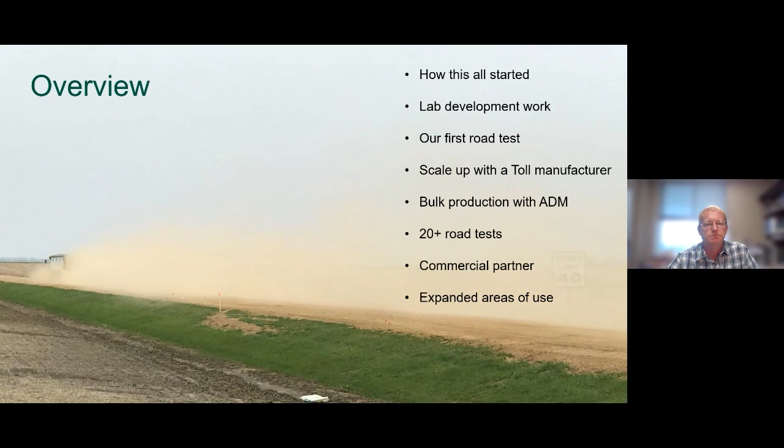So how did we get started? So several years ago, prior to this, I worked on a lot of research projects that were led by other principal investigators, and a large part of these were soy focused, and I would help them turn their lab scale soy product into gallons of material that they could share with other companies. So I learned quite a bit about them and how to make these materials and how to tailor them to

get the desired properties. And about that time, there was a call for road dust research in the Bakken oil field. With all of the expanded drilling platforms and the gravel roads that were being put up and the huge amount of truck traffic, there was a big dust problem going on out there, and they wanted people to research that and see what the effect of the dust was and look for solutions there.

And also at that time, I learned of glycerol glut. Glycerol is a byproduct from biodiesel production, and there's enormous amounts of glycerol generated as a waste product. And so if you can find something to do with that, you've got a cheap, ready supply of material.

So based on what I had been doing in the soy research environments, I thought, well, maybe I can use glycerol to modify the soybean oil and make something that can be dispersed in water and used to help the dust problem out in the West. So I approached the North Dakota Soybean Council with a proposal, and they funded my first grant to start our work in the lab.

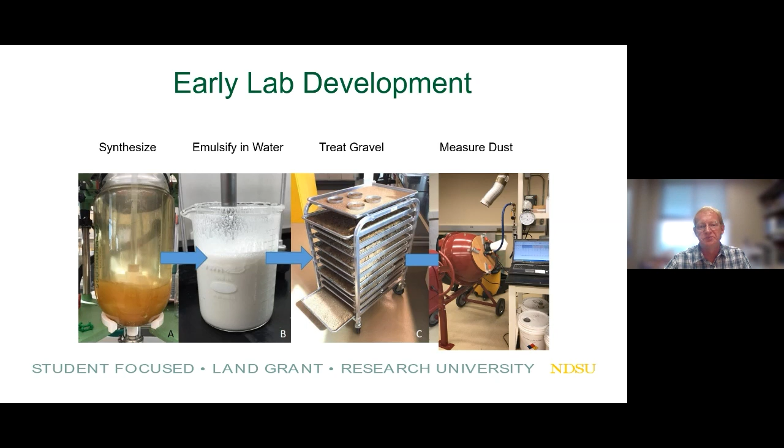The material itself isn't just a blend of soybean oil and glycerol, because soybean oil and glycerol don't mix. They're immiscible, kind of like water and oil. So the approach we take is to use the glycerol in a chemical reaction to break down the soybean oil.

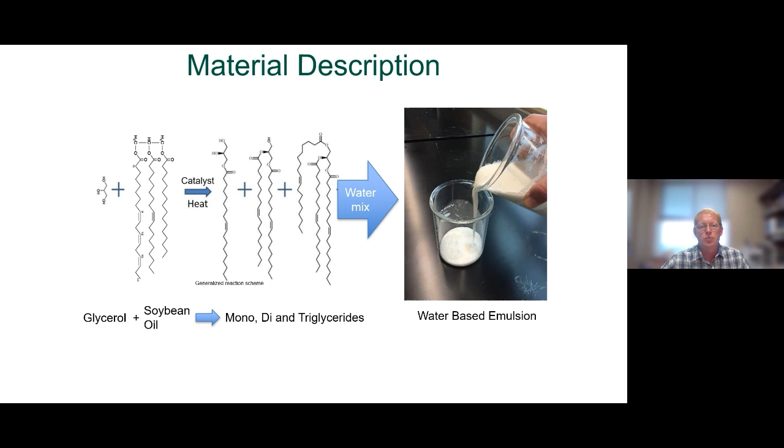Soybean oil is a triglyceride, so it has 3 of these long fatty chains. What we do is break this apart into 3 subpieces so that we make a monoglyceride, a diglyceride, and then some of the oil remains as the triglyceride. By forming these mono and diglycerides, they become the surfactants, the emulsifiers that allow the product to be dispersed in water. So essentially we're making our own emulsifier from the soybean oil itself, which is really what makes our product unique and allows us to be water dispersed without the additional costly emulsifiers.

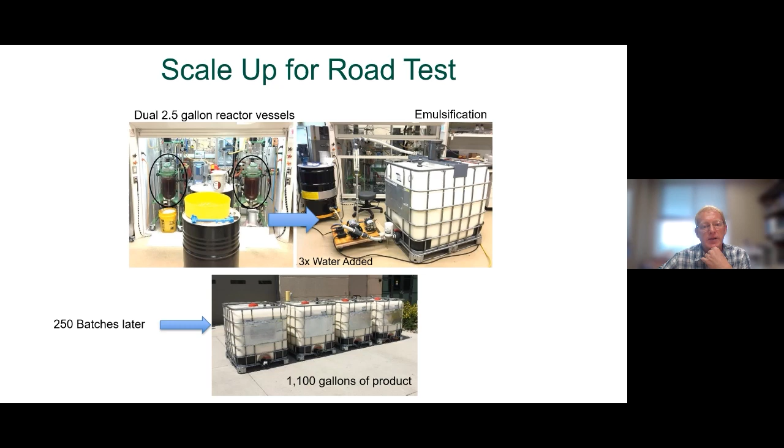The Soybean Council was pleased with our work in year 1, and they funded us again to scale up and make enough material to do our first road test. We utilized our 2.5 gallon reactors in our lab at NDSU — I have 2 of them. I made about 250 batches, 2 each morning and 2 in the afternoon, for about 4 months, making this concentrate. Then I emulsified it with water using this homemade setup, and produced 1,100 gallons of emulsified product that we used for our first road test.

This road test was done on County Road 22 in Cass County — the Prosper Road. It's about 5 miles of gravel with a lot of truck traffic; there's a grain elevator down there. This is a problem road for dust and stabilization. Jason Benson from Cass County helped us coordinate this site. We treated the first 600 feet, and the remainder of the road was treated with calcium chloride, so it was a really good comparison study for us that summer to see how we compared against the standard of calcium chloride.

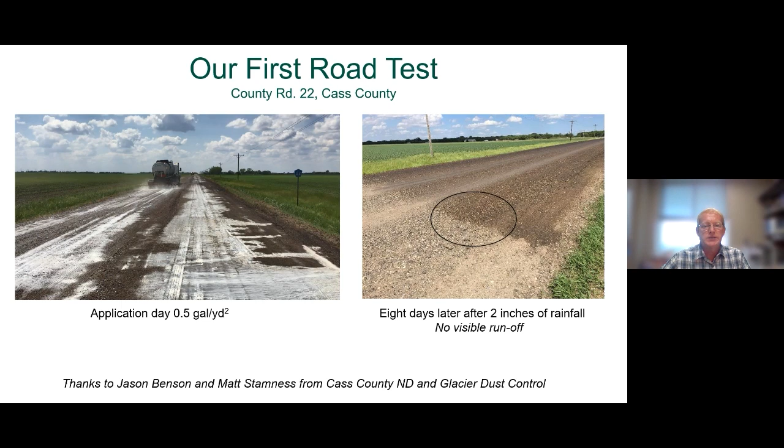One promising thing you can see from the photo is that after 8 days — this is application day — after 8 days and 2 inches of rainfall, you can clearly see the outline of where our product was put down. This shows that the rainwater didn't wash it away or cause it to migrate to the shoulder. It stayed in place once it was put down and cured.

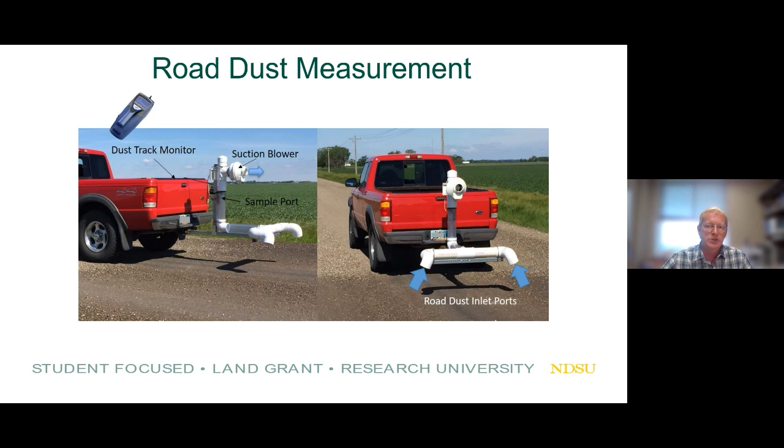So we needed a way to test our dust control and see how well it was working, and we built this apparatus — the idea was borrowed from Penn State. It basically consists of a vacuum cleaner mounted on the back of a pickup truck that draws in the dust cloud through two ports as you're driving down the road. Inside there's a laser detection cell that gives us the total amount of dust per cubic meter of air, so this is a real-time dust measurement. We can simply drive this down the gravel from the treated section to the untreated section and see the difference in dust generation.

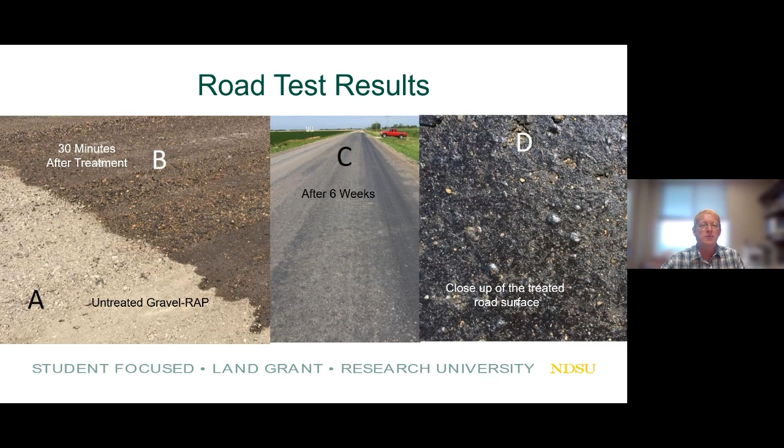This sent us down another path of not only using this material for dust control, but also using it to rejuvenate and find uses for reclaimed asphalt pavement, because there's huge piles of this stuff sitting around, and they're always looking for new ways to utilize it.

The following year, we did crop toxicity testing, because a lot of people asked, what if I spray this on my road? Is it going to kill the crops, and what's it going to do to the plant life? So we partnered with Dr. Kirk Howatt at NDSU Weed Science, and we set up test plots with 6 crops: wheat, oats, canola, lentils, soybeans, and sunflowers. We planted those crops in stripes across rectangular test sections, about 10 by 25 feet or so. Then we randomized them and did 4 different application rates with replicates.

We did a section where we sprayed the ground right after we seeded, a pre-emergent application. Then a few months later, post-emergent, we sprayed directly on the leaves in a similar test matrix.

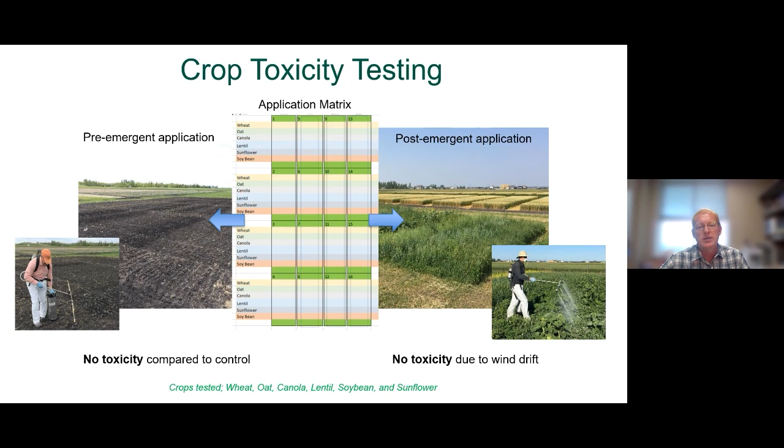The result of this study was that we did not see toxicity compared to our controls. Only when you completely saturated the leaf did you see some wilting, but it still didn't kill the plant at that point. This was meant to simulate wind-blown carryover—let's say your road's being treated on a windy day and some of that is being blown away as a fine mist. That fine mist would never be enough to completely saturate these leaves. So we're pretty confident that our product is non-toxic and not harmful to plants, which is good.

With continued funding, this time from the United Soybean Board, we scaled up even further. So no more 250 batches in my lab. We partnered with a chemical toller in South Carolina, and they have a 100-gallon vessel—actually their smallest reaction vessel—that we used to successfully scale up our process. We made 4 50-gallon batches of our material.

The other focus of this was not only to scale it up, but to show that we could use cheaper, unrefined starting materials. Prior to this point, we were using food grade soybean oil that I bought at Costco, and refined glycerin, and those are fairly expensive. So we wanted to show that we can scale it up and also use bulk crude materials to start with.

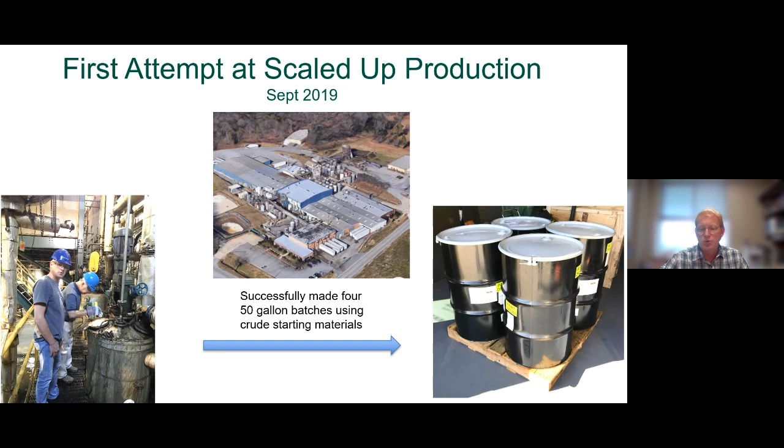Both of those points were played out at this stage. The following year, with continued funding from United Soybean Board, we scaled up even further. This time we partnered with Archer Daniels Midland. They have a pilot facility in Decatur, Illinois, and a 2,000-gallon reaction vessel.

Unfortunately, due to COVID restrictions, I wasn't able to travel and be on site. So we did everything over phone and email, but it went really well.

The first 2 batches were done faster than expected, and we had extra time and money left. So we decided, hey, let's just make as much material as we can within our budget. And we ended up making 55 totes, 275-gallon totes of ready to apply product.

At this point, we were working closely with BioBlend, and they helped coordinate a lot of the additional test sites. Originally this project was just 4 test sites, but we were able to make that additional material, and then with BioBlend's help, expand our test sites into over 20.

These are predominantly in Iowa, North Dakota, Minnesota, but also in Kansas, Arizona, and a few places in Canada. Not just county roads—some of these were gravel quarries, recycling plants, fertilizer facilities, and so forth. Here's a few pictures of some of those sites.

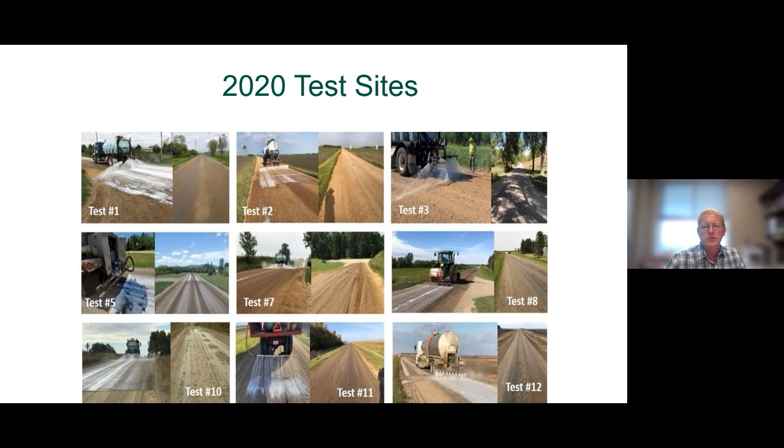This is more detail on one of the sites that we did. This is in Pisek, North Dakota. This is a township road, and you can kind of see a farmstead right next to it. Now, the farmer inherited this farm—it's a family farm, been in the family for generations—and he moved back there recently to retire, but the house was right next to the road.

He said the road dust problem was so bad that you couldn't even be in the yard when a car drove by. He was considering selling the property, and he heard about our research and begged us to do a test up there. So we did. We sent them a tote, and you can see he's using a borrowed crop sprayer.

This worked okay. The nozzles were a little small, so the spray was a fine mist. It just took many more passes. Normally you could do this in 1 or 2 passes—I think we did it about 10 or 12, but it still worked.

2 weeks later, we have a real nice firmed up base and no dust. This farmer couldn't be happier with the results. He's already ordering more and is thrilled that he can have the product on hand and apply it on his own without having to hire somebody.

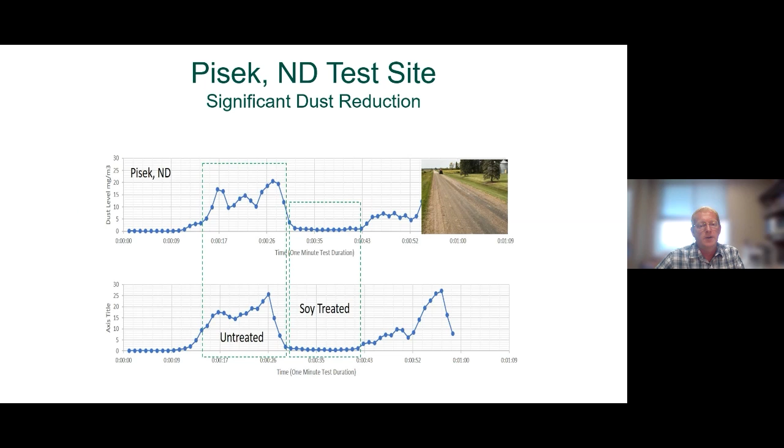So here's the vehicle mounted dust data from the Pisek site. On the left side, you'll see it's 0 because I'm just getting started. Then I start driving through the untreated section. There's quite a bit of dust, but then when you drive in front of his farmhouse, dust levels come way down. And then they pick up again as you pass through off to the other side. These are 2 passes that show a very good result at this site.

Recommendations for new users: usually when calcium chloride and mag chloride are put down, they pre-wet the road to help it soak in. That's not really necessary with this product. In fact, sometimes it performs better if the road is dry—it'll soak in and coat better.

Possibly if you have a sandy, loose roadway that when you wet, the water just runs right through it, then you may want to pre-wet. That'll help our product stay more in the upper layers where the dust is generated. And of course, it's always best before you do any dust control to prep the road, blade it, reshape and restore that crown, and bring that loose material from the shoulder back up and smooth it out so that the product has the ability to penetrate all of the loose surfaces on top. And then it's best to keep traffic off until the whiteness disappears for best results.

If they do drive on it, the material is non-corrosive, so that's another thing that sets us apart from the chlorides. It won't corrode your vehicle, and it cleans up easily with warm soapy water or just taking it through the car wash.

If you're interested in trying this material in your region, I would encourage you to get a small amount of material and test it on your gravel, because every county is different and your application rate may vary from the county over. The best way to determine if this is going to work for you is to purchase a barrel or a tote, enough to try, and you can try different application rates in the process and kind of dial in what works best.

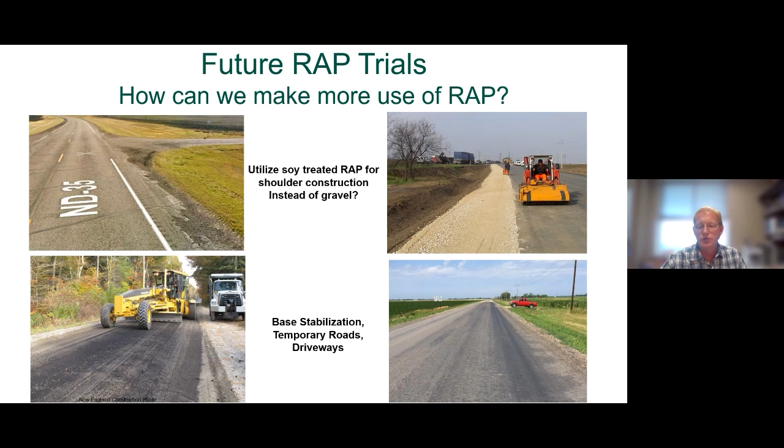Other markets beyond roads include gravel quarries and mining operations. They're extremely dusty with a lot of truck traffic, so we have a few of those going on. There's a windmill farm where we're doing testing as well. With the drought right now, these operations are trucking in thousands and thousands of gallons of water every day. One operation has 4 semi-trucks running nonstop, just spraying water to keep the dust down at these sites. Eventually economics come into play, because the fuel consumption just to spread that water continuously is quite high. So at some point that's going to pay for a dust control product that you put down and you don't have to keep reapplying it on a daily basis.

Other applications would be grain elevators or egg facilities where you have a lot of truck traffic on an unpaved lot. Horse riding arenas generate a lot of dust, and they don't like to use chlorides because it can dry out the horse's hooves and cause cracking, where our material doesn't do that.

National parks and protected areas are also good applications for this material due to its environmentally friendly nature. If you're close to sensitive waterways, this is going to stay intact and not pollute. There's an almond orchard we've done testing on in California. These gravel roads run right through the orchard, so of course they don't want to pollute that with chlorides or anything that would be toxic to the almond trees.

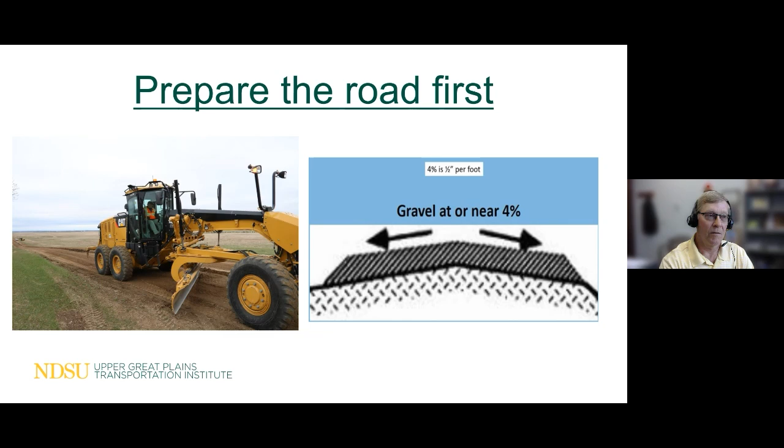This test strip was on a township road, generally fairly low traffic. However, during the farm season, it's a supply route for a fertilizer plant, so there gets to be quite a bit of heavy commercial traffic and field traffic as well.

We obtained permission from the town board first before applying the product, because they're the road authority and own the road. It's a good idea to talk to the road authority first to see what kind of permits may be required. I'll show you the video of the product being applied.

This is just a farm water truck with a 3.5 horse engine pressurizing a PVC pipe boom with 3/16 diameter holes drilled into it about every 3 inches.

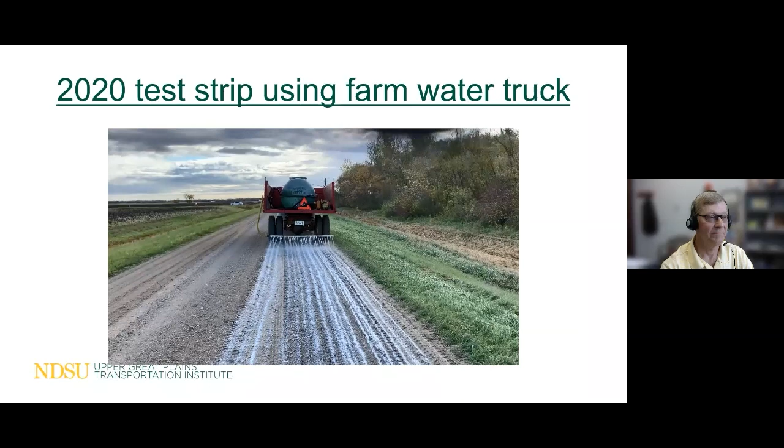Here's another short video of the product in action. You can see the reduction in dust as the vehicle reaches the treated segment there. It's quite significant, and that was taken this spring after the product had overwintered on this roadway.

As I mentioned, it was applied September 25th at 0.34 gallons per square yard. Virtually no dust was observed throughout the fall season. I applied a second application this spring on May 8th at 1/4 gallon per square yard, and I'm still seeing great performance, with a vast improvement compared to the dust generated with no material applied at all.

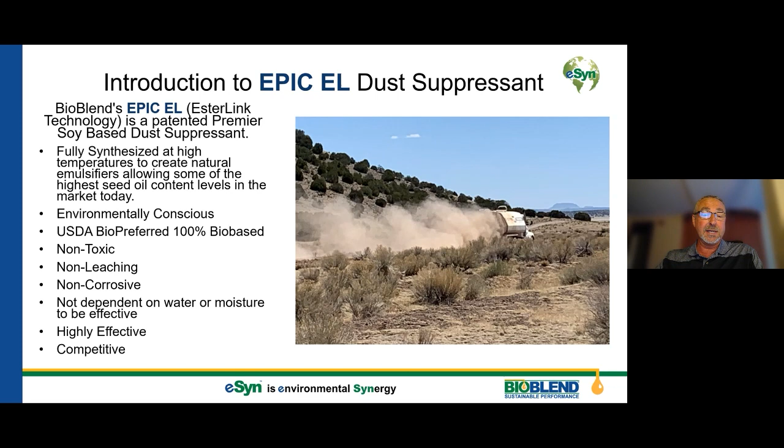The commercialization efforts that we've done over the last 18 months: it was released on Earth Day of 2021. Like I said, 16 to 18 months' worth of research and development has gone into it from our standpoint, working with Jim, primarily focused on the Midwest. We've tested, as Jim said, many different versions of it, some with success, some with failures, but at each junction we learned a lot, and we pivoted to make modifications and come up with a good solid product as we have today.

To date, I know Jim had talked about 20 test sites. We're up over 30 different sites that we've tested on, and continuing to evaluate a number of the most recent sites that were put down this spring.

As I said earlier, we've done a lot of research on the raw material side, trying to find the best source points to keep this product as cost effective as we can. That has proven to be a little bit difficult this year, just because of the prices of soybeans and ultimately soybean oils. But we're doing our best from a logistics standpoint to bring the product to market by the most cost-effective means possible. And, as Jim talked about, looking at some of the other applications, we've been working closely with Jim on that, and going through and securing regulatory approvals.

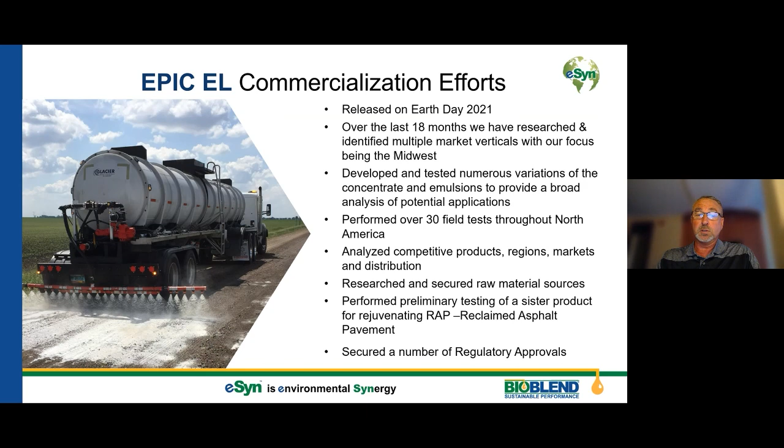The EPIC EL, we deliver it in the most economical means possible, ideally in a pure concentrate form, which I'll share pictures of here shortly. And if we can't ship it in the concentrate form and have you mix it, we can ship it in an emulsion form. Either product can be shipped in bulk, totes, drums, and pails.

We prefer you to work with one of our business managers just to optimize. Every road surface, every region is different. So we can work together to hone in on what your application is, to come up with the best concentration ratio as well as the best application rate.

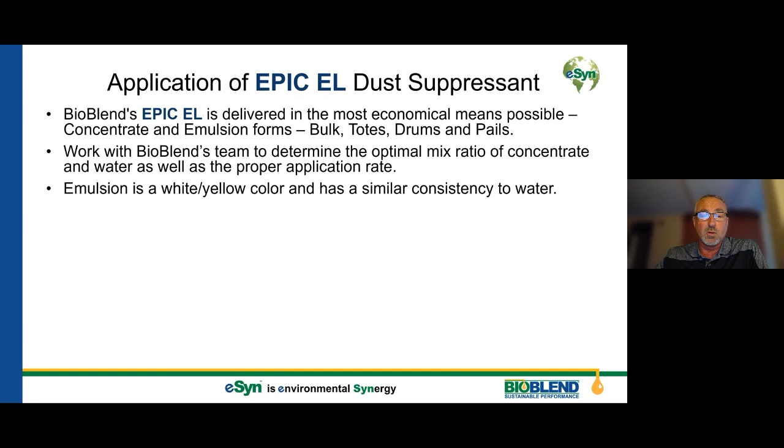When it's emulsified with water, it still has a water consistency to it. It'll be more of a white, yellowish color, kind of like whole milk. And typical application equipment can be used to apply this product. You really don't need anything high tech for it.

Having commercial units spray it is obviously the best path if possible, but if you're looking to do just a small portion on your own, of your township road or your driveway or within your own farmland, any type of equipment can be used, as you've seen from some of the stuff that Jim and Kelly shared as well.

Ideally, we want a pressurized spray bar. We want to be able to calculate this to make sure we're getting the right amount of product down. We don't want to skimp on the amount going down, making sure it's going to perform for you. If we're going to go through it, we want to make sure that we've got the right amount going down, and it seems to be somewhere between 0.4 of a gallon to half a gallon per square yard.

Cure time can vary. Obviously weather plays a big part in that. The cure time with Kelly's application up there in Kittson County took a little longer. It was a cool, cloudy day. There's been other applications where, on a nice sunny warm day with a gentle breeze, it will cure where you can drive over it within 10-15 minutes.

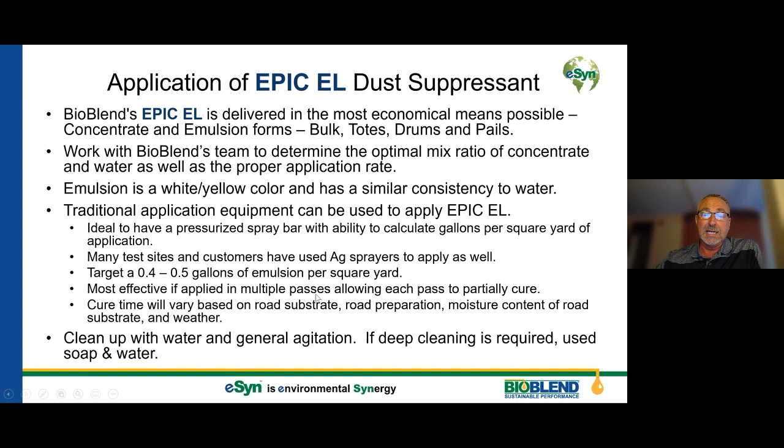Clean up when you're done. It really is simple, as Jim talked about there. It cleans up very easily with water. It may take some general agitation in your tank, but if you really needed to do a deep cleaning, just soap and water will do just fine.

If you did this and let it sit for 24-48 hours, you may have to do general agitation to it again to get it to fully emulsify, but that is what the product that you're looking to eventually apply, you want it to look like that.

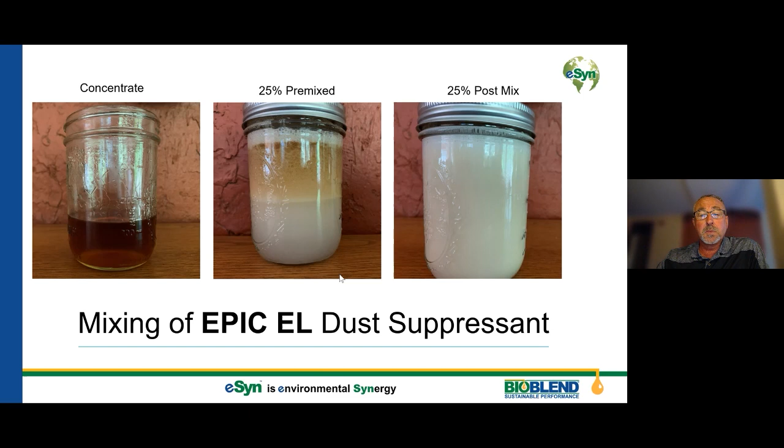Traditional contract spray systems, as you saw in some of the pictures there, are what you see a lot of out today with chlorides. Those traditional types of spray systems can be used with this product as well. All different types of nozzles and spray bars and booms.

The main thing, you want to be able to measure how much you're putting down, and you want a good even spray pattern. You don't want a lot of overlap from your spray pattern, and you want to be able to adjust so maybe you're not spraying quite so hard on the outsides of the road as you are in the traffic pattern areas of the roads.

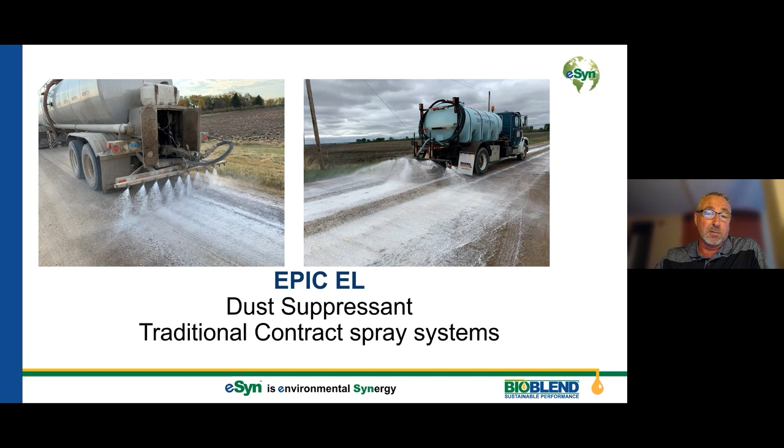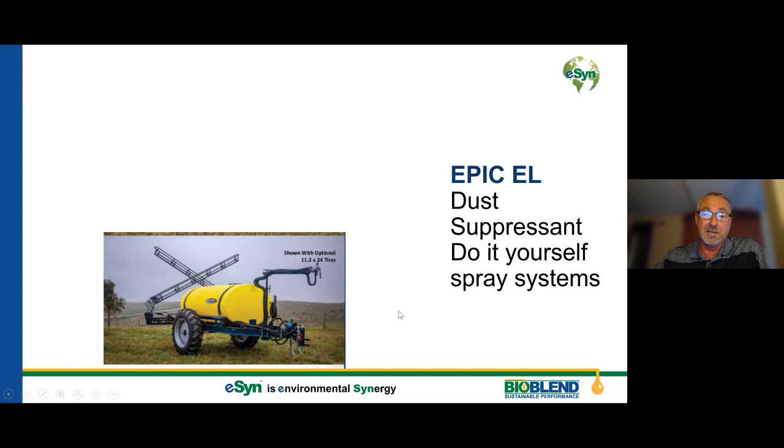You want a good heavy coverage on it, not misting. If you do have it misting, you're going to have to do multiple runs to make it effective. I've had a number of people use it just on their side-by-side ATVs, similar to that. Very effective means to do smaller areas.

So some of the ideal uses that we see, as Jim talked about alternative uses, but really in those environmentally sensitive areas. This product is not going to be as inexpensive as chlorides. So you have to evaluate where is the best place for it, and finding those environmentally sensitive areas, that's a good place to start.

Uses in high maintenance areas, intersections, inclines, corners, those areas where you've got a lot of acceleration or braking, you end up getting the potholes, the raveling, the rumble strips. Those are great areas to look at applying this product, really truly to help stabilize as much as keep the dust down.

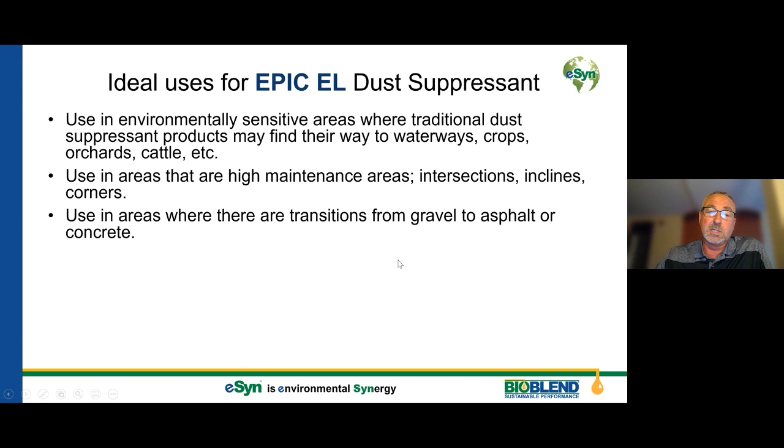Transition areas are always troublesome areas, where you're transitioning from an asphalt road to a gravel road, or a concrete slab coming into a grain elevator, for instance. Those areas tend to always need a lot of maintenance. Great spot for this product.

Then also early spring and late fall. Traditional type products keep that moisture in the soil. At night when you have temperatures dropping below 32 degrees, you tend to get potential freezing. With this type of product that will not happen. You won't get those potentially slippery surfaces because of freezing.

And then unfortunately right now a lot of areas are experiencing severe droughts, and where other products need that water, that moisture to be effective, this product does not need the moisture. So once it's applied, it's going to be effective whether it's a rainy season or a drought.

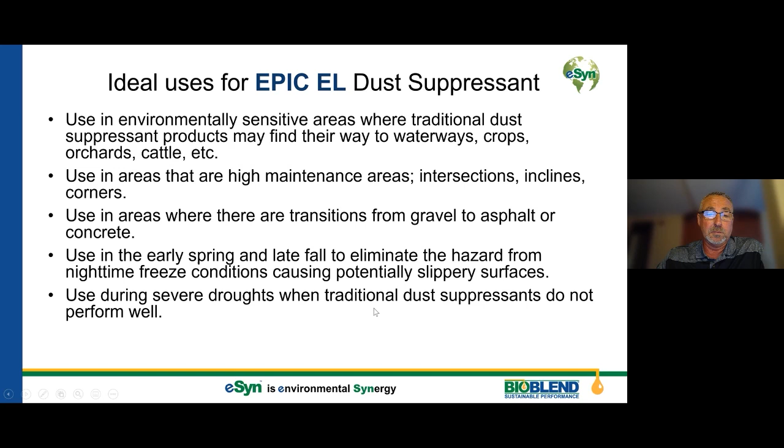Some of the approvals that we've received to date: as I mentioned earlier, the USDA BioPreferred. We did get that stamp, 100% bio-based. We did run third-party toxicity testing over and above what Jim's team did for crop toxicity. This is also a certified test procedure for products.

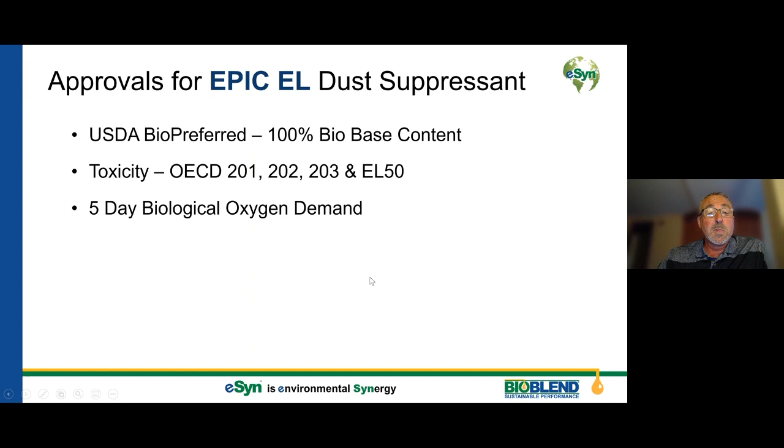We did a 5-day biological oxygen demand test on the product. We did a toxicity leaching procedure called TCLP, which is typical in landfills. This gives an idea of how much it could leach. And as we talked, there really is no leaching of this product. Once it's cured on the roadway, it sets up. And then we've started the process through the Organic Materials Review Institute as well.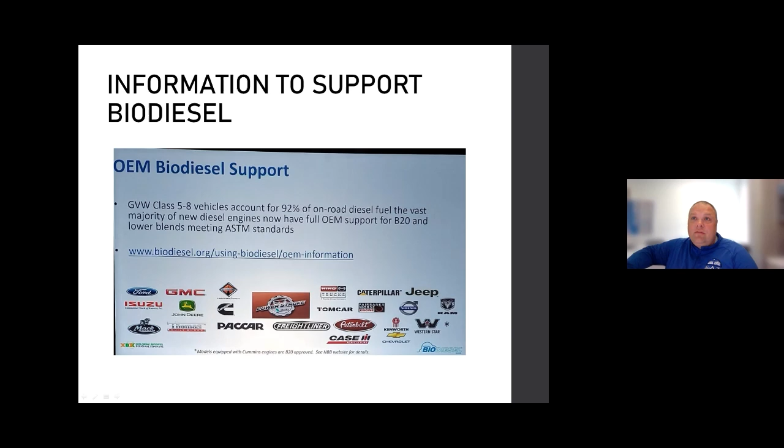Well, thank you guys for having us. On behalf of myself and the rest of the folks at Cities Area Transit, we're very honored to be here today to share our success story and our roadmap to where we're at today with the use of biodiesel. How it all got started is we were approached by the folks at MEG Corp a few years ago, and we were invited to attend a national biodiesel conference in Florida with them, a See for Yourself conference. So we attended that conference, and we learned about the use of biodiesel, the support from the manufacturers, and also the quality of it as well.

So with that being said, we attended that conference, learned more, and then we heard from end users and vendors that were using biodiesel. What really stuck with me was the folks in the heating and oil industry and their success stories with the use of biodiesel, and the less maintenance they need to do on their home furnaces.

That kind of put a light switch in my head to bring it back to my boss, Dale Bergman, and the folks at Cities Area Transit to talk about maybe we should try this. I think we have something here.

So we spoke with our staff, met with our maintenance staff and other folks, and with the great resources from the National Biodiesel Board, the North Dakota Soybean Council, and of course the great folks at MEG Corp, we decided to move forward with the use of biodiesel.

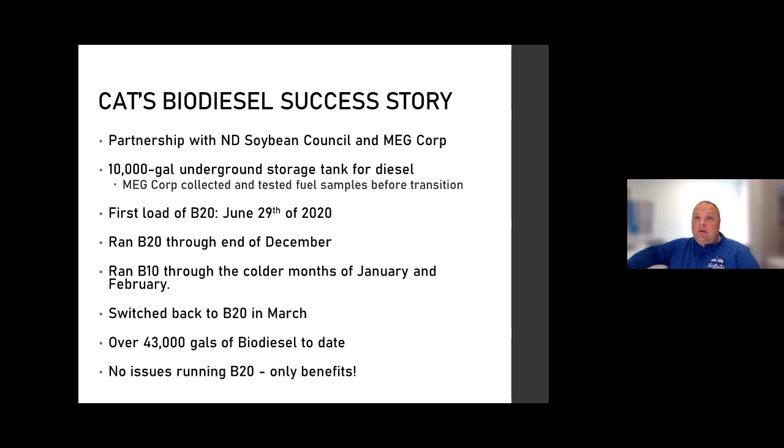So to date, we've burned over 43,000 gallons of biodiesel. And I'm happy to report that we have not had a single issue running B20.

What are those results? Well, first of all, most importantly, our environmental benefits. As Scott alluded to earlier, our CO2 pollutants were down 15.28%. That calculates to 108,969 pounds of emission reduction for our folks in the city of Grand Forks. So we were very excited to see those numbers.

Also, a recent study that's come out by the U.S. Department of Agriculture and Argonne National Laboratory found that biodiesel reduces greenhouse gas emissions by 72%. So very, very good numbers coming back as far as the help for the environment.

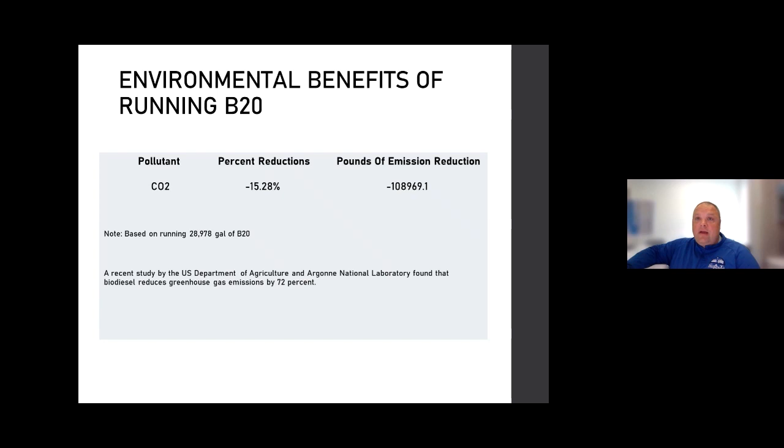We also noticed in our shop, we park our buses inside at night and they start up in the morning. We noticed a great reduction in exhaust fumes and other issues with having those buses in our shop. So again, happy to report the benefits of running B20.

As a transit agency with our buses, we operate in very high idle percentages. This creates issues with our emission systems. Our engines are all emission-based engines. We have what we could call the first generation that has a DPF filter, or diesel particulate filter, on it. What this does is it traps exhaust soot and ash in the exhaust and basically keeps them in the filters.

So what's B20 done for us in this regard? Well, it's helped us reduce the stress of the DPF filters plugging. And this has resulted in a major reduction of maintenance costs for us and downtime for our equipment.

Also, in our newer generation of emissions engines, they now use diesel exhaust fluid, or DEF fluid. We've noticed a great reduction in the use of our DEF fluid as well with the use of biodiesel, because our filters are having to regen a lot less due to the use of biodiesel.

So as I stated before, our oil samples are coming back cleaner, with a reduction of anywhere from 30 to 40% in soot levels. So why are we seeing that?

In an emissions engine, a diesel has an EGR valve. If the exhaust gases being monitored by the computer aren't clean enough to go out into the atmosphere, it recirculates through the engine, into the oil, and then back out into the exhaust. Because of our use of biodiesel, we're burning a lot cleaner fuel, and that's why we're seeing a big reduction in those problems.

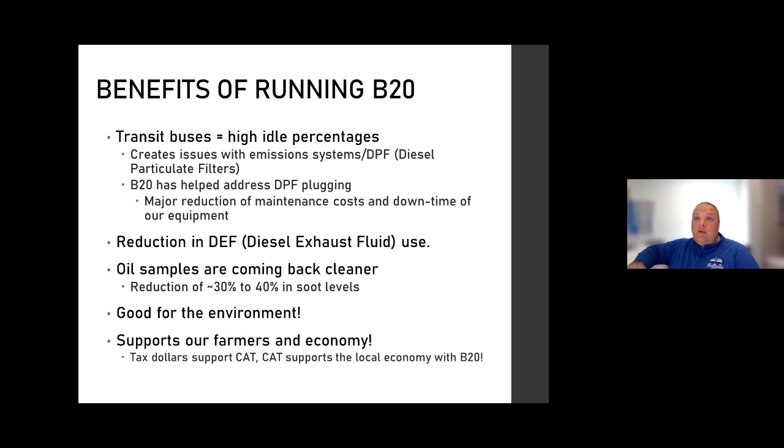It also supports our farmers. We come from a farming community here in Grand Forks, so we're very happy that the tax dollars we get from farmers and our local area can, in turn, run biodiesel and give back to the farmers as well.

I have a few pictures to share. This is our DPF filter before the use of biodiesel, and this filter was in for about 4 months, so you can see it's completely plugged. In a DPF filter, there are small honeycomb tubes running down through, and as you can see, the top of this surface is completely plugged along with those honeycomb tubes.

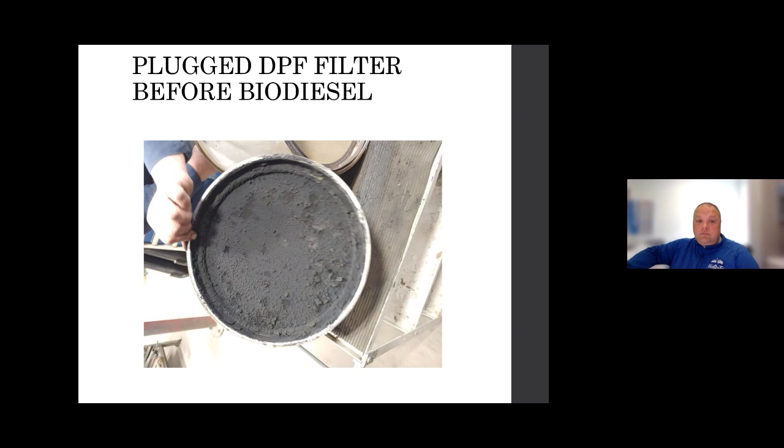What we noticed with biodiesel is we took a bus apart and noticed our DPF filters were a lot cleaner. This is an example of running a DPF filter with biodiesel for 12 months. As you can see, just a little bit of soot on top of that DPF filter, and you can see those honeycomb tubes, not a whole lot of issues, just very minimal soot on those filters.

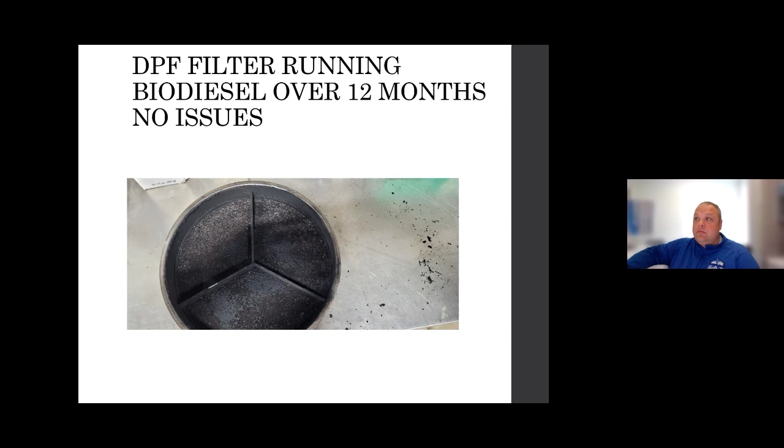This is the secondary filter that sits above that one, and you can see here it almost looks like a new one. So this is what a clean DPF filter looks like, and back to the secondary filter after 12 months. We're very excited to see our results from running B20.

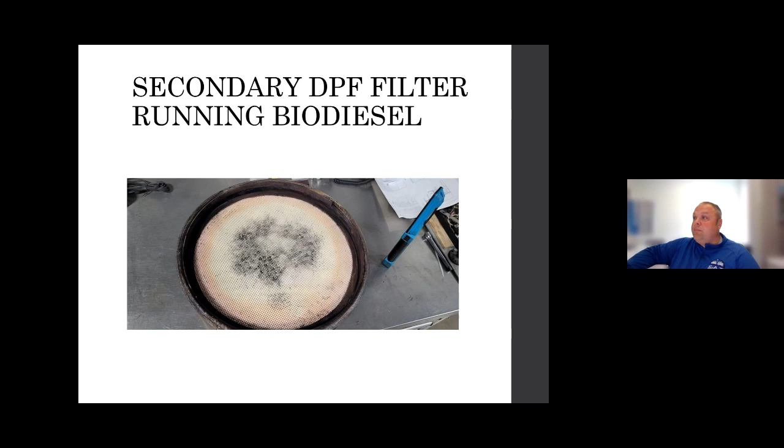So why is biodiesel the answer? Well, the oxygen in biodiesel provides more complete combustion, and it produces 50% less soot than petroleum diesel. The two most important things are having low ash in your oil and a good quality fuel. We're very happy that we found this in B20, and it's providing us with great results.

So less soot means DPF filters fill up slower, resulting in fewer regens. It enhances performance through higher cetane, adds lubricity, and puts less stress on our DPF filters. The particulates that build up in the DPF filters will burn off easier than those from ultra low sulfur diesel, and the result of less need for regen and plugging filters is increased fuel mileage for us.

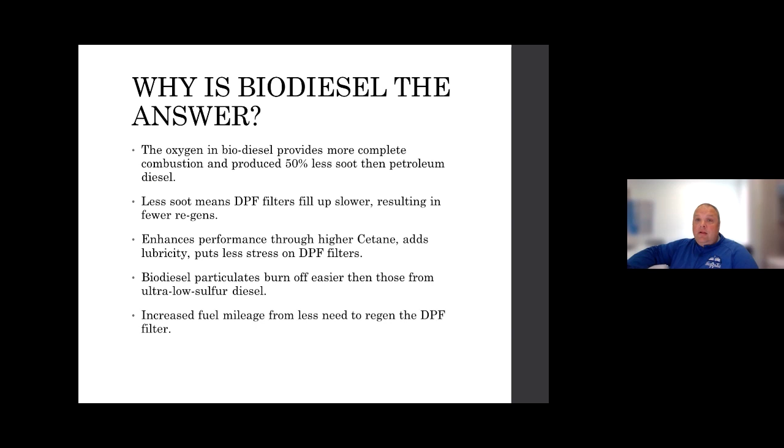So we're very happy to see the results. Less maintenance costs and increased fuel mileage have really benefited our facility.

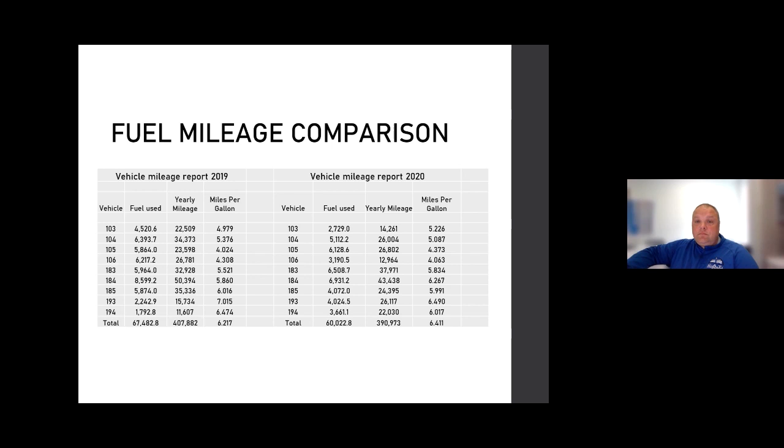Wow, Nathan, that was incredible. Not only are you an advocate for the local farmers in the state and the product, but the data, the photos, this is absolutely not just a gut feeling. You have the information, you've tracked it. Impressive.

What are the rest of your board's thoughts? Our division director, Mr. Bergman, is very excited with the results. He's been super supportive and has let me run with this. Our city administration is very excited to see the results, and it's just been a great experience. I can't thank everybody involved enough for the support we've gotten.

What's really exciting is there's no upfront cost. We've spent $0 in upfront infrastructure costs, and we've always wanted to be environmentally conscious.

Use of electric buses, there's so much infrastructure cost to get started on that. So this was something that was very exciting, with no upfront cost, nothing upfront, and to be able to do this and see the results, it's been really beneficial for us, and we're really excited to share our experience.

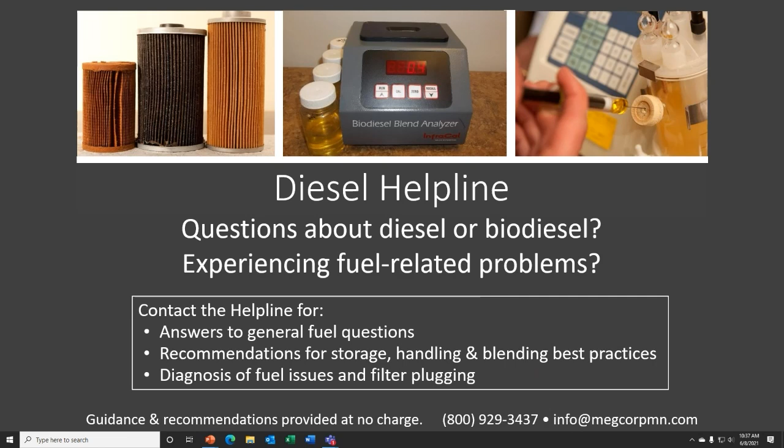Here's my contact information for any fleets that would be interested in learning more, having us come out and do a presentation. And then, of course, there is the diesel helpline for anyone who has questions before they consider using biodiesel or any fuel-related questions that they may have.

Lisa, wow, so quite the service you provide. So yeah, in the fleet, I get it, you're going to help them, but what about the local farmer who wants to switch over?

Are you willing to and able to help them with their tanks and review? Definitely. We have a number of farmers that are using B20, and like you said today, your son-in-law, Mike Langseth, I know he's using B20. Just talked to him recently.

Most farmers are not going to need to have someone come out and check their tanks before using it, but definitely give us a call. We will take the samples. You can always, we're at farm shows, so you can bring the samples there or call us. We'll tell you how to send them into our office. But we do have somebody located up in Fargo as well who has made site visits.

Wow, wonderful service. So soybeans saving the world, or at least making a big impact in the transportation world. We've heard about dust control. We've heard about biodiesel. Incredible, Lisa. And Nathan and Scott, thank you so much for helping us understand the biodiesel end.

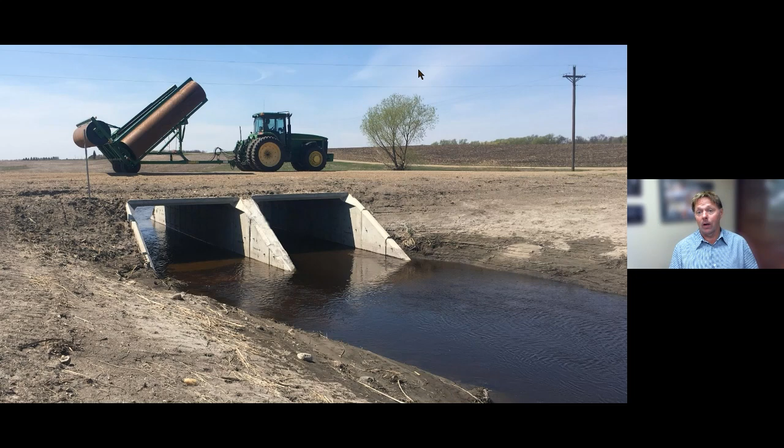Let's take a look at bridges. Here's what we normally would think of bridges, right? We can all picture that. But by the general bridge definition, a bridge is something 20 foot and longer in span that carries a load, carries traffic. So this box culvert weighs in and is categorized as a bridge. Also, multiple pipes, depending on how they're configured and the size, can also count as a bridge. The national federal bridge definition is 20 foot and over. Those are the bridges that we inspect.

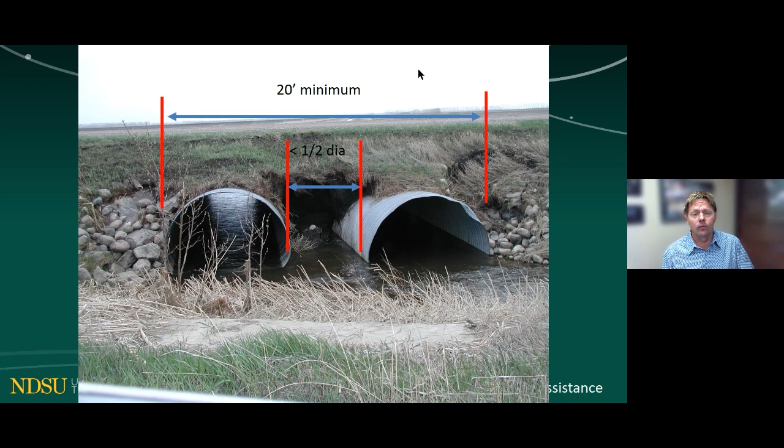Let's quantify it. Of roughly 3,100 bridges on the local network in North Dakota, about half of them are good. That means we've got a lot of challenge. We've got a challenge to keep those good bridges good and get the fair and poor bridges up to speed. Sad news is 14% are poor. Scary news is 21% of the bridges, 1 in 5 in North Dakota on the local network, is posted. That means as industry, ag, our payload over the roadway network has a disconnect, or a potential disconnect.

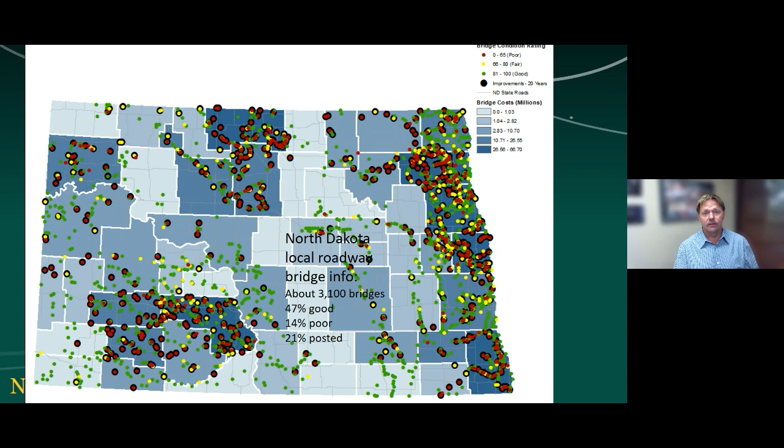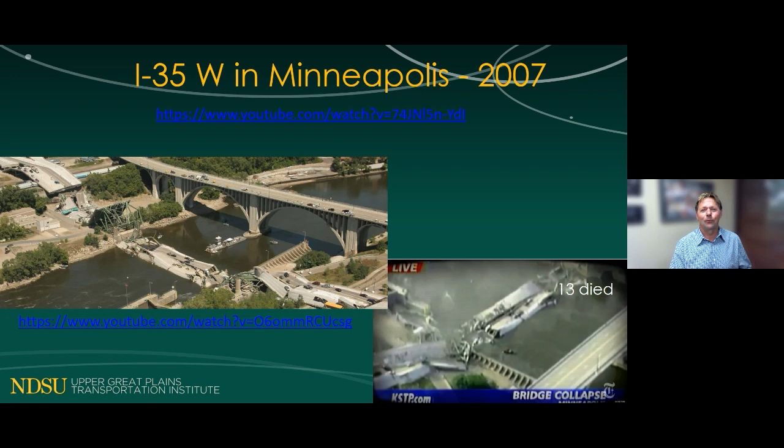What's the relevance? The relevance is bridges are bridges. They still create that connectivity issue. They still provide that lifeline for our transportation network, and when they're in good shape they provide a safe means to cross over something. So when we look at a flood locally, we see on the news a bridge is washed out, a culvert washed out. How does it impact us? Just like the I-35, just like the Ohio bridge, people die. People die when our bridges go down. So the Vision Zero concept with the North Dakota DOT really targets our bridge program along with the other assets in the transportation system.

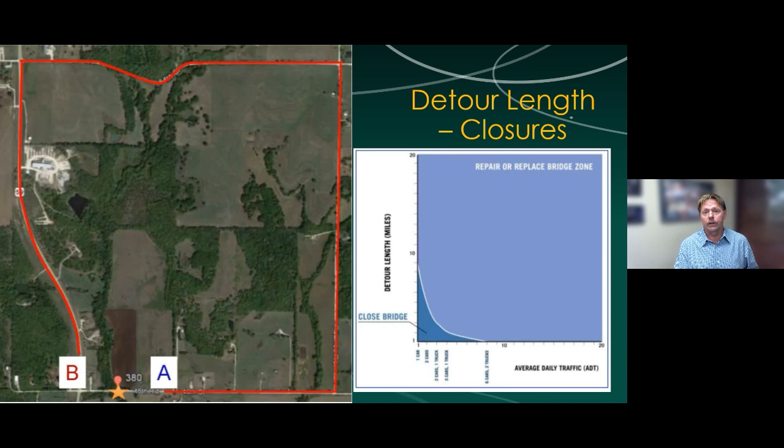And what can we do? Well, let's take a look at what it means first. Bridge out. None of us want to see this sign because it means our route is probably a little bit longer, or maybe a lot longer. Now, if I'm in a car, that short distance between A and B changes to the red line. In a car, it might be an inconvenience. However, with ag equipment, with industry, that can be an incredibly terrible subtraction from your bottom line, an increase of cost. So we have to really manage our bridge network so that our state's business vitality remains high.

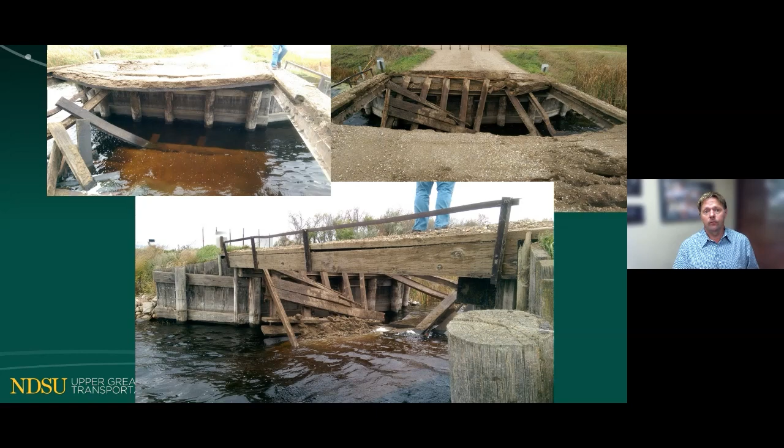What does it look like in the field? Sometimes our width restrictions are a problem for our equipment and bridges come down. That's a just shy of $1 million bridge that went down. Sometimes it's the loading, the stress that our equipment puts on with posting; sometimes we don't see the signs, or they're neglected, and we carry loads that are too heavy, and bridge components fail. What about bridges in very remote locations that only serve maybe one field, one farm? How can we justify spending $500,000 to $1 million on a 100-foot long structure like this? It's difficult. So how do we take care of them?

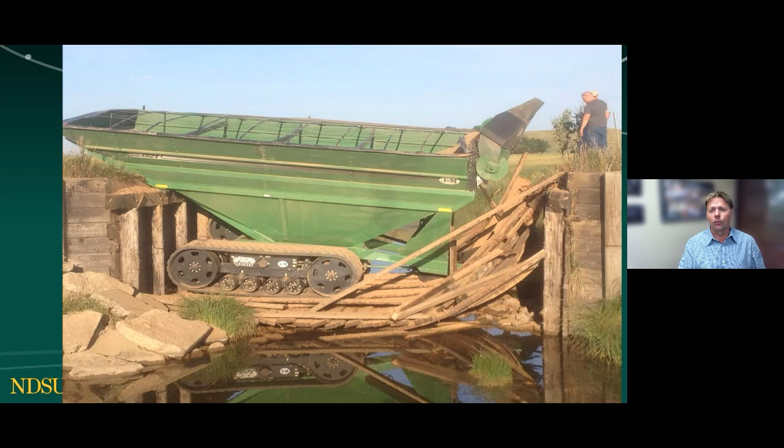Sometimes we don't understand. In this example, we had a grain cart that carried many full loads over a structure. The tracks, as they turned mid-span, created a toppling effect of the beams, and the bridge failed. And this is with only a partially loaded cart. So sometimes it's not weight, it's the forces that we put on that bridge deck, not fully understanding how we're loading a bridge. And then Mother Nature is so strong. We've got bridges that are washed out, bridges that are undermined, and we've got to constantly work on them.

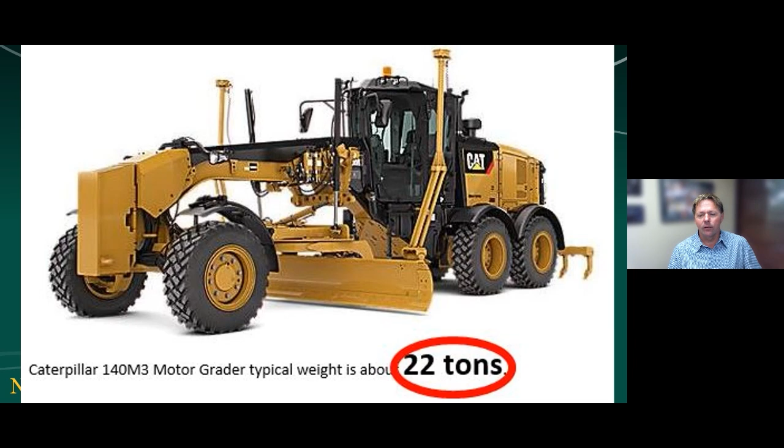We have to understand the equipment, whether it's our oil or our farm production equipment, and when we're maintaining them. Think about the counties, townships, and cities that have to go over the roadway systems. A typical blade without any attachments is 22 ton. And yet, look at this example, a 4-ton posting. We've got to maintain that roadway with a 22 to 25 ton blade. It's difficult. So it's in the interest of not only our business model but also our maintenance model to have a sound bridge network. What does it mean if we take that blade over that bridge and maintain it in a traditional form? Fortunately, this isn't a picture in our state, but these bad things can happen.

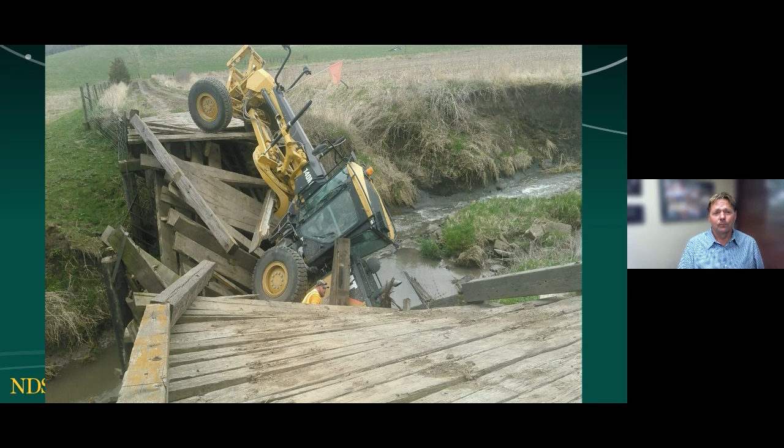So bridges in North Dakota, 1 in 5 posted. We can do better. Our counties, our cities, our state, we're doing phenomenally well. We're bringing that number down. We're not going to be at 40th worst very long, but we do have a long way to go. There's a wealth of information at our bridge class.

Federal Highway has information for us to look at. Please tap into us. If you want to come to our bridge class, let us know. We'll check you in free. Say you love soybeans and you'll get in free to the class, because together we can do great things.

So that's a little bit of information about bridge condition, the bridge health in North Dakota. And with that, I really want to now get into how the Soy Transportation Coalition with Mike Steenhoek figured out a way for soybean and soybean production to help our bridge condition in the state. So with that, I'd like to turn it over to you, Mike, if you would, please.

Well, good morning. Thanks, Dale, for the opportunity to be with you today. The statement I like to tee off with is: the area of the country in which the condition of our bridges is most severe or most dilapidated also happens to be the area of the country where resources are the most scarce or on the decline, and that's rural America.

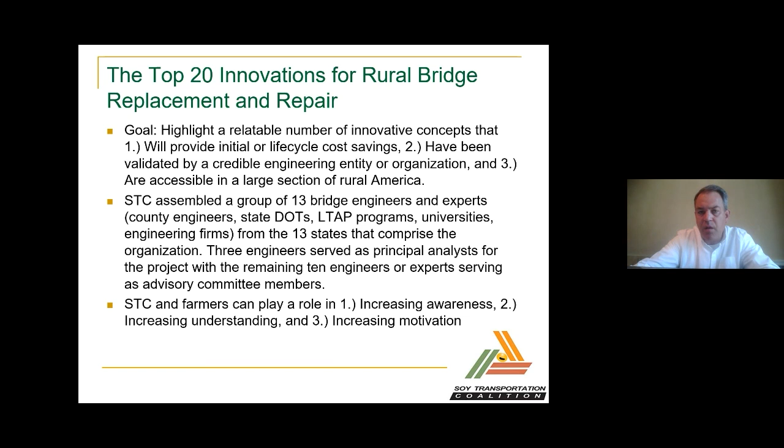It had to, number one, provide notable cost savings. Number two, it had to be affirmed or validated by a credible engineering entity, an entity like the Federal Highway Administration, Iowa State University, Purdue University, Transportation Research Board. And number three, it had to be widely accessible throughout rural America.

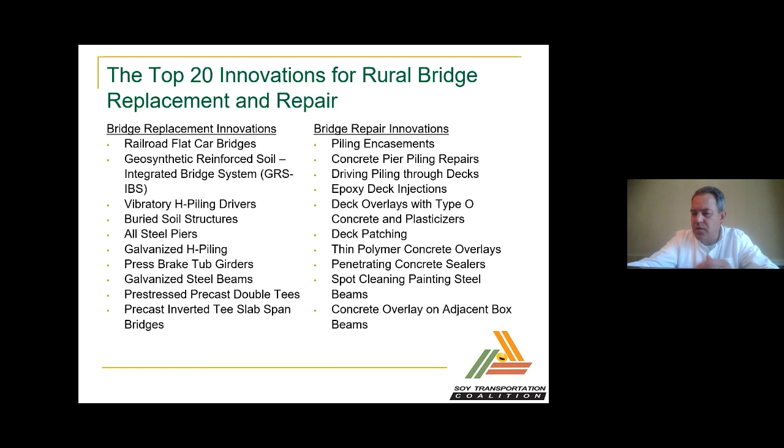So we assembled this group, and as you can see, Kelly Bengtson from Upper Great Plains was one of our principal analysts and provided some real quality feedback into this ultimate report. And we arrived at these 20 concepts: 10 bridge replacement innovations, 10 bridge repair innovations. I'm not going to go through each one in the interest of time, but I'm just going to highlight a few of them that made their way onto the list, so you can get a feel for what is contained in this report.

One of the concepts that is highlighted in our report is the use of railroad flat cars for replacing rural short span bridges. And we do a profile of each of these concepts. We talk about what the cost savings will be, and as you can see, with the railroad flat cars, you can have easily a 50 to 60% cost savings.

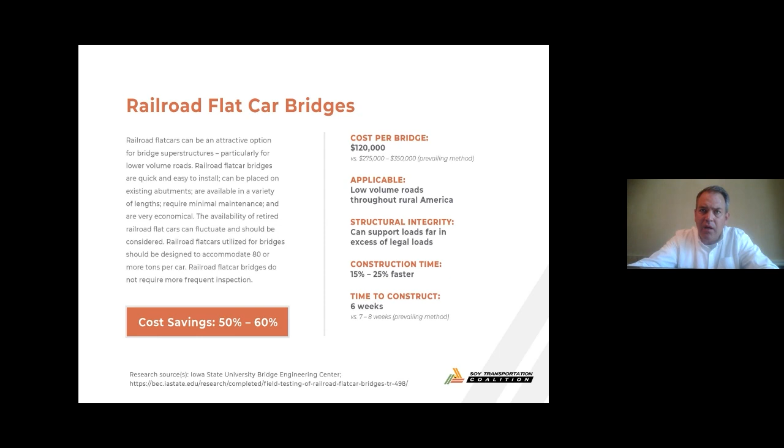One of our principal analysts in the report is a county engineer from Northeast Iowa, former president of the National Association of County Engineers. He has replaced about 30 bridges in his county alone via this method, easily saving taxpayers in his rural county $3 million just by using this concept itself. Again, think of a rural county that would not embrace the opportunity to save that kind of money.

Another concept that generated a lot of enthusiasm among the group is the use of vibratory H-piling drivers versus the traditional impact pile driving method, in which you attach this vibratory hammer to an excavator, and instead of having to pound that piling into the ground, which is more costly, more dangerous, takes longer, you're able to use this vibratory hammer and do it much quicker for significantly less money.

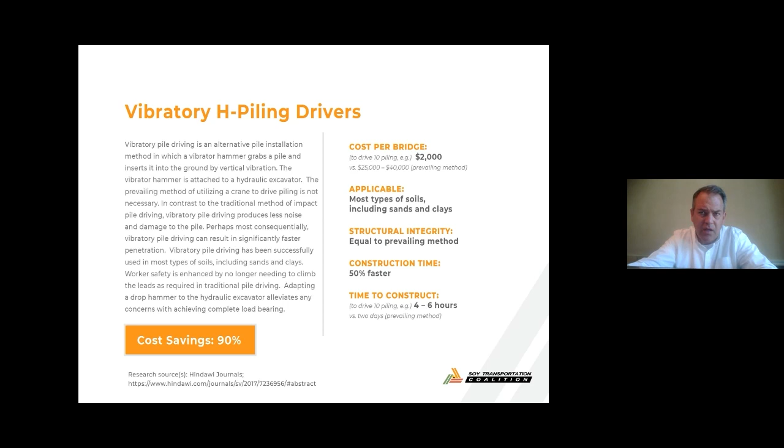So as you can see on the slide, the cost to drive 10 piling via this vibratory method, $2,000 versus $25,000 to $40,000. That's, again, just driving 10 piling, significant cost savings. Again, rural counties need to embrace these kind of opportunities. We need to save our way out of this problem and not just spend our way out of this problem.

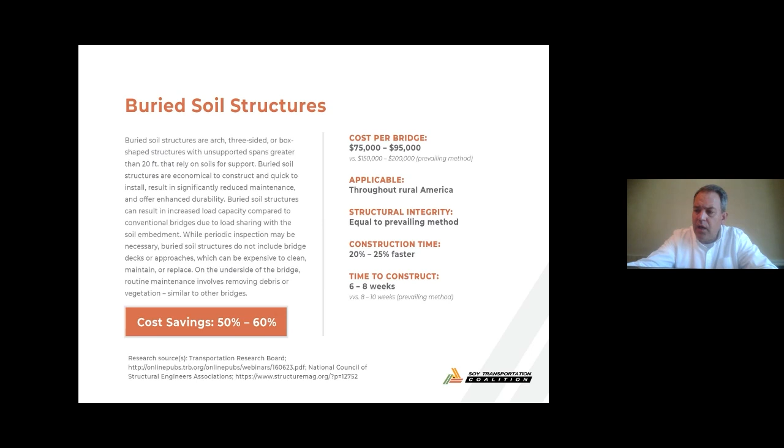And what I like about these concepts is they don't exist on paper. They exist in reality. You can drive to these. You can drive over them. You can visit them. You can talk to actual engineers who have successfully utilized them. So this is not just a hypothetical exercise. We wanted to make sure we were featuring things that have actually successfully been utilized, to help increase the confidence to employ them in other areas of the country.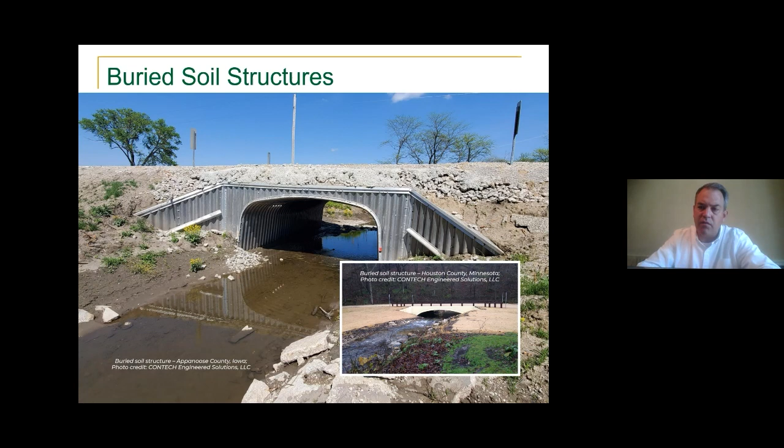So moving forward, we look forward to working with all of the variety of states, including North Dakota, and we appreciate this great partnership we have with Upper Great Plains, the LTAP program, and we look forward to continuing to promote this into the future.

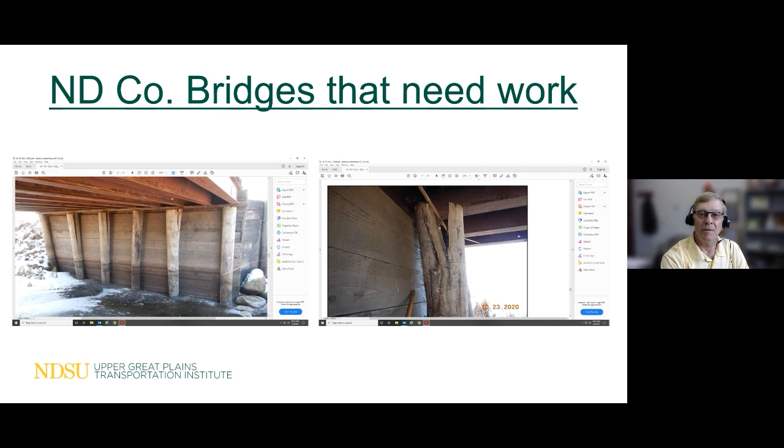Timber bridges tend to have issues with splits on their piles, and that looks like this. This is a timber abutment. An innovative repair already being utilized in Pembina County of North Dakota is to use culvert bands to shore up the timber piles to prevent them from splitting.

Piles that are rotted can be encased in metal culverts and then filled with concrete. That's another innovative concept in the report, this one from Bottineau County in North Dakota.

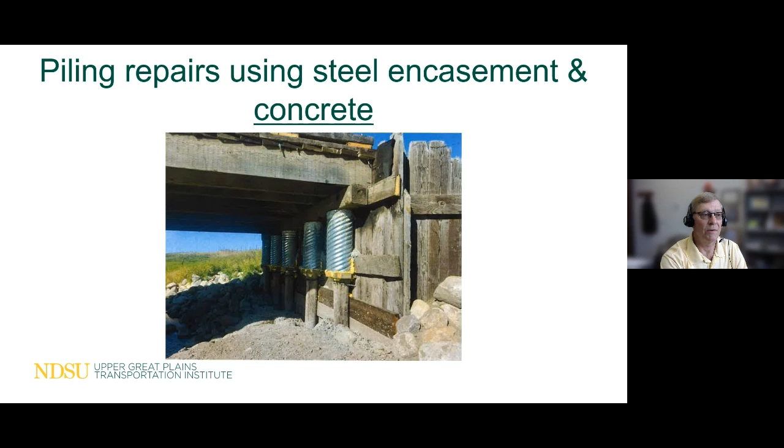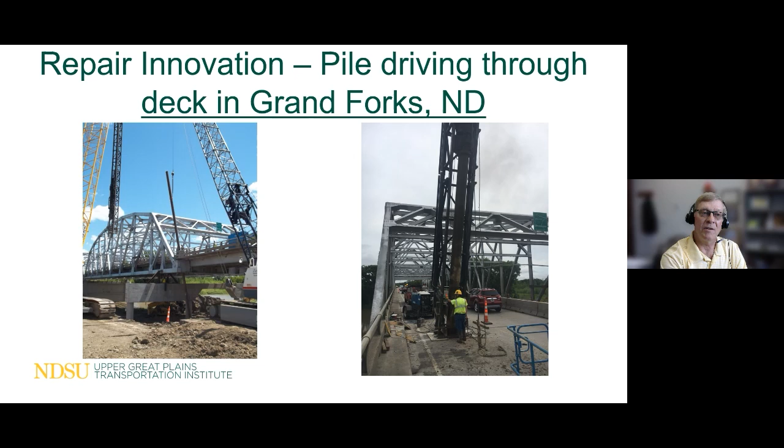And in Grand Forks County, the bridge on US Highway 2, well known as the Kennedy Bridge, was repaired with a new abutment and new pier using a concept from the innovative bridge report where we can drive piling through existing bridge decks to save time and money.

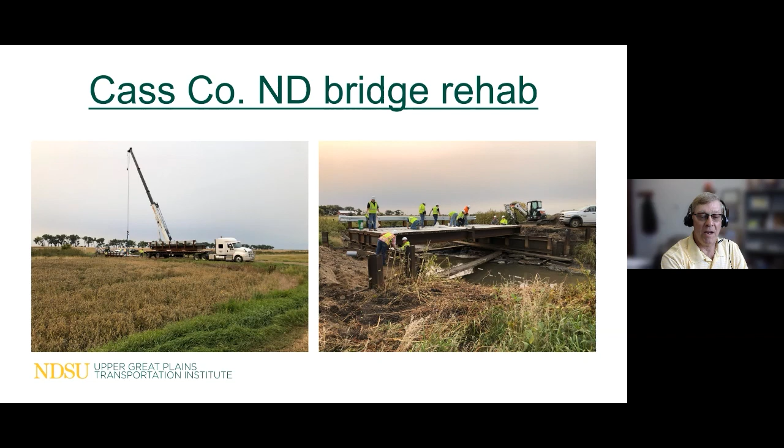And in Cass County, a township road bridge had a timber deck that was replaced with a welded steel deck, shipped out in 3 panels, placed with a crane, and assembled by the Cass County Highway Department crew.

Another concept is press brake tub girders, developed at West Virginia University by Karl Barth. Brian Keierleber, one of the primary panel members, obtained a federal highway grant of $350,000 to build the first bridge of its kind using this design concept at Fairbank, Iowa.

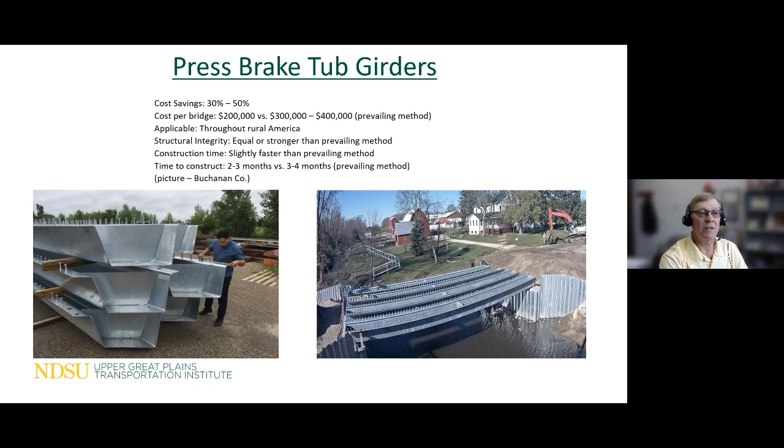Among the top 10 bridge repairs, a lot of mention was working on the decks, because you want to protect your bridge decks - it's like protecting the roof of your home, to prevent it from having leaks. So a lot of the concepts are for sealing decks, and one practice is to use a pickup-mounted sprayer to simply apply a deck sealer, as shown here.

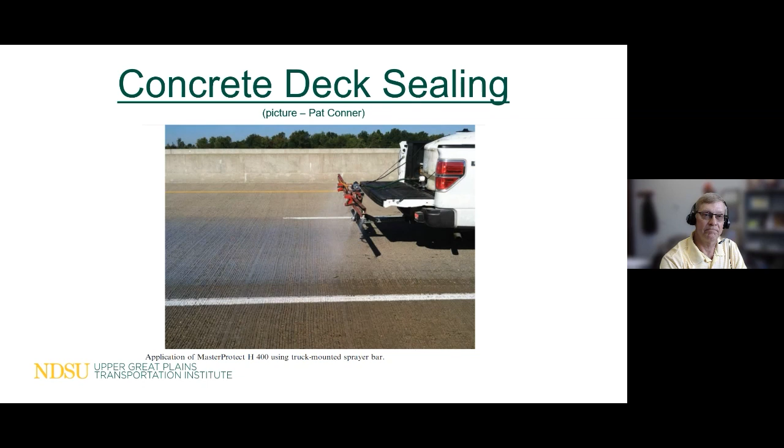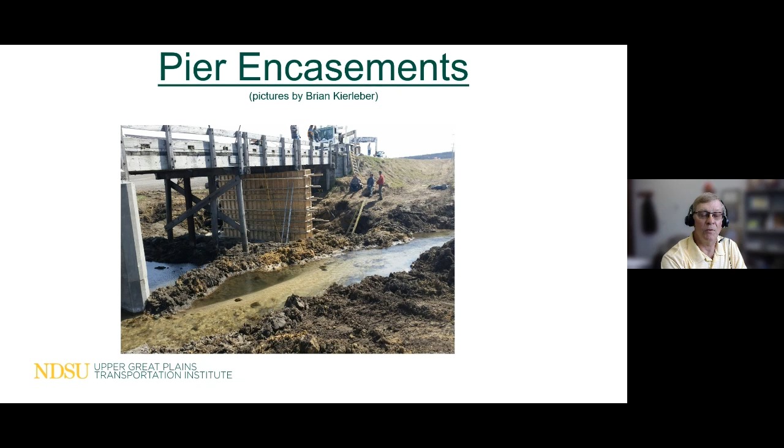Timber piers can be completely encased, formed up, and filled with concrete to fortify that pier. The same goes with using steel.

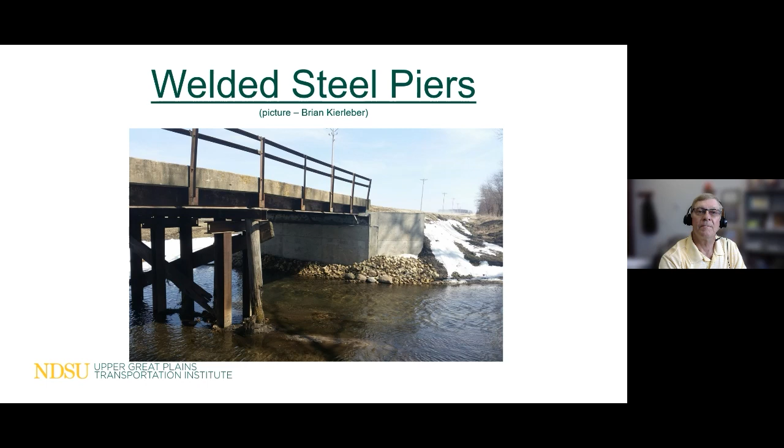Concrete piles can also have issues, and they can be encased in metal culvert bands and filled with concrete as well.

Bridge safety inspection is important, and if you've been paying attention to the news in the last month, a bridge near Memphis, Tennessee on Interstate 40 is closed to traffic because a crack was discovered during inspection, and there's 40,000 vehicles per day being detoured currently onto I-55.

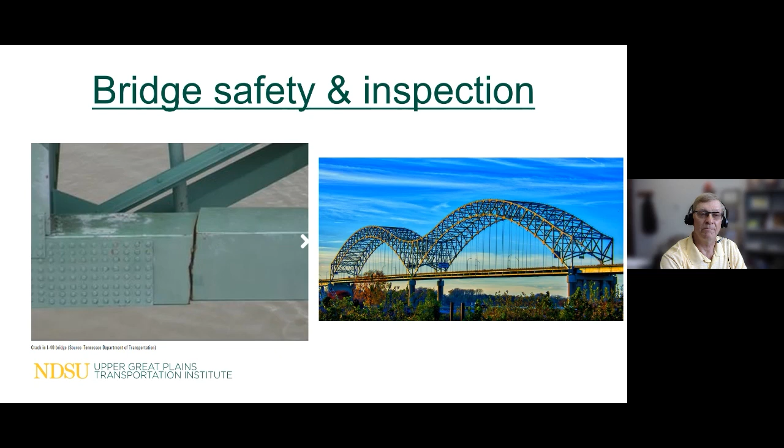So use the top 20 bridge innovations list and be safe out there. Call me if you have any questions. Thank you.

Well Kelly, nice job sharing some of the work that you and the others from the area put into helping us summarize and provide a concise document for options for repair. I just love working with our friends at the local township counties across the state, and seeing the innovative ways they are doing maintenance and work like that. So exciting, so exciting. Thank you for being part of that, Kelly. You bet.

And so now we've heard about dust control, biodiesel, and how soybeans are saving bridges and making our roads more passable for the bottom line of our farms and industry. But what does it mean to the person in the field? Jenna, can you introduce our next speaker?